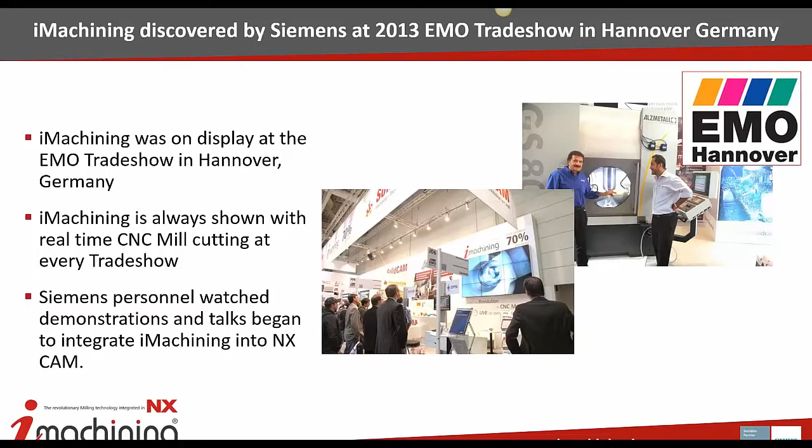Siemens became aware of iMachining back at the EMO trade show in Germany in, what was it, Greg, 2013? Yep. They were really intrigued by what they saw, and we approached each other and started development on the software. iMachining's been on the market 4 or 5 years; it's not new technology, so you're not going to be a guinea pig. It's proven technology working around the globe. The integration to NX itself has become our focus.

A little bit of what it can do for our customers. Much faster cycle times. We're managing the tool's engagement in the material at all times, so we're seeing tool life increases of anywhere from 2 to 10 times over traditional methods. It really performs well in hard materials: Inconels, titaniums. The harder the material, the better iMachining works, and we're going to show you why. You can also use smaller, less expensive tools because we're managing that engagement in the material at all times. We're finding that customers can use smaller, less expensive tools and actually get better productivity.

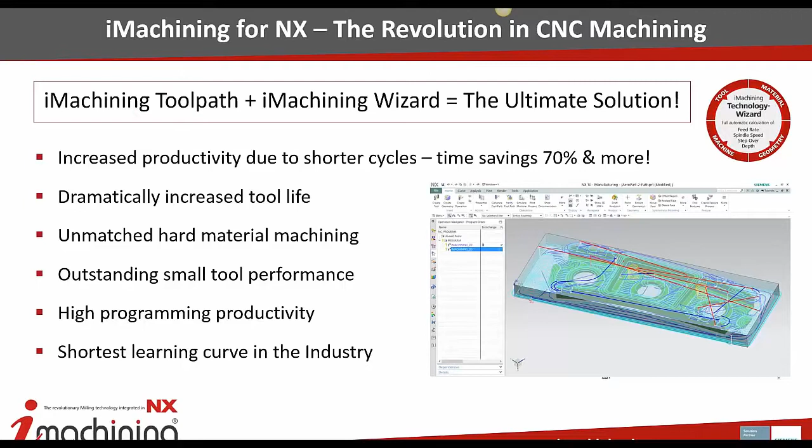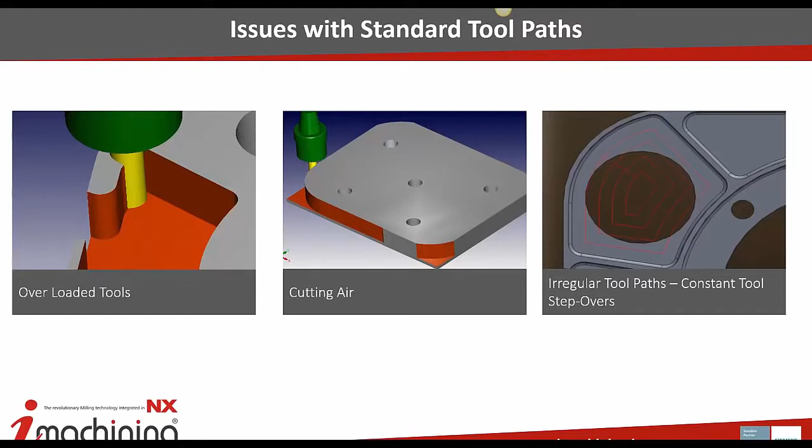Just touching on some of the technological differences between traditional milling and iMachining. Some of these scenarios might look familiar. Typical milling or machining, you're running the tool into a 180-degree engagement, and that's tough on the machine, it's tough on the tool. You have to slow things down in order to accommodate for those corners. So typically, if you're not working on a model, a lot of air cutting. And also, with your regular tool paths, you're typically using constant tool step overs.

So some of the things that iMachining is going to do, I'll throw this over to you, Greg, if you wouldn't mind. So what we do is we maintain controlled step overs. We're looking for a minimum and maximum engagement, and we maintain those. And as we're doing that, we're also adjusting feed rates as well. So if your engagement goes down, your feed rates go up to maintain a consistent chip load.

As we're machining, we're constantly updating the in-process workpiece. So we're aware of where we've cut, and we know where we need to go. And we're always trying to do intelligent transitions from cut area to cut area. Sometimes we determine that we're not going to retract completely out of the part and move over. We'll slightly move down or slightly move up a couple thousandths and transition to the other side of a pocket at a fast speed. We don't typically rapid when we do that.

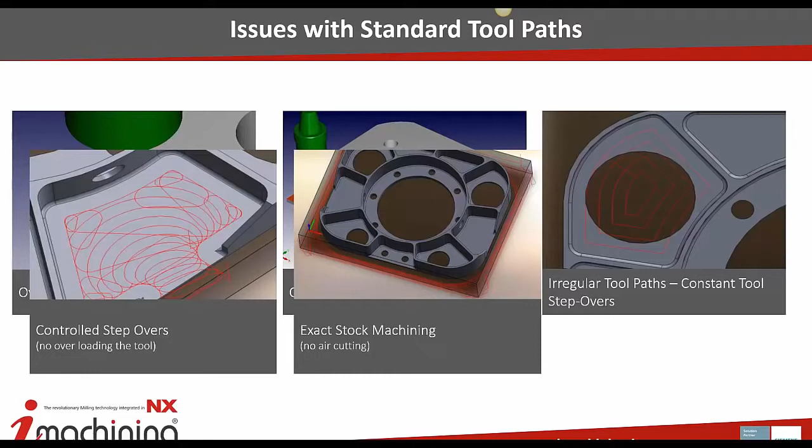We give the customers the ability to rapid. The majority of the time, we control like a 500, 600, or 1,000 inches per minute feed rate over to the other position. And we can transition around the part and do a contour transition to another area.

Smooth tangent tool path, so we're always trying to roll in and roll out of the material. So you're getting a thin chip as you're going into the cut, and you're getting a thin chip as you're coming out of the cut to make those transitions easier.

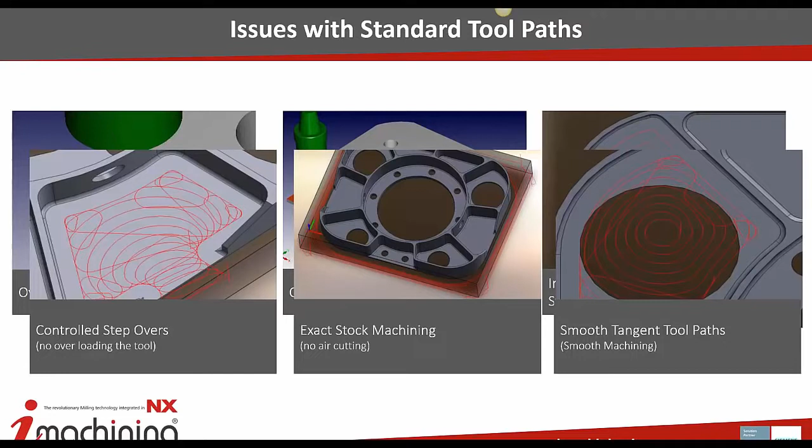Can you speak up just a little bit? Sure. For the audio online? Sure. Recording.

Some of our patented features in iMachining. One thing we do that nobody else is able to do is a spiral morph, which is the most efficient way to remove material from a specific area. And we do that by maintaining a minimum and maximum engagement. And working from the center out, we start at a spiral, and as we transition out, we try to create the shape of the boundary that we're cutting.

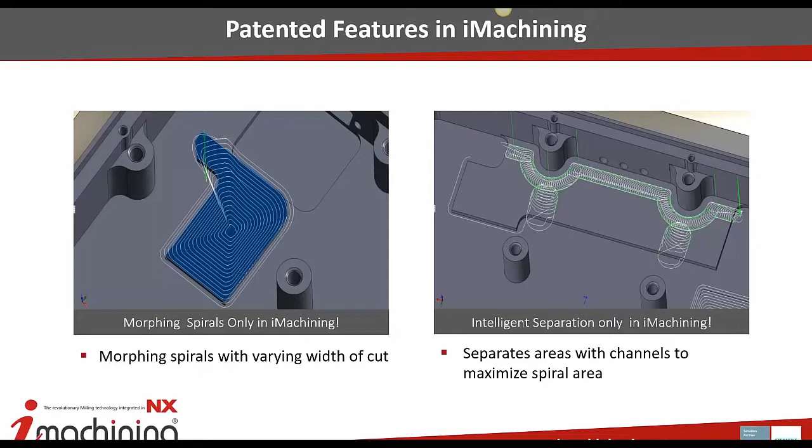Another thing that we do is separation. So we look at a specific area and determine, would it be more efficient to do a spiral morph for this whole area, or would we separate it out into individual channels and then create 3 independent spiral morph areas? So we do time calculation with both results, and we pick whichever one's faster. This kind of shows what a finished channeled and then spiral morphed area would look like.

Some people in the room might be familiar with the term trochoidal, and we get compared with that a lot. We don't do a traditional trochoidal. We do what is D-shaped contouring when we do a slot. So we transition, engage into the material, make a cut, transition out, move slightly up, and fast feed across. So you're not doing a consistent feed rate and doing large circles.

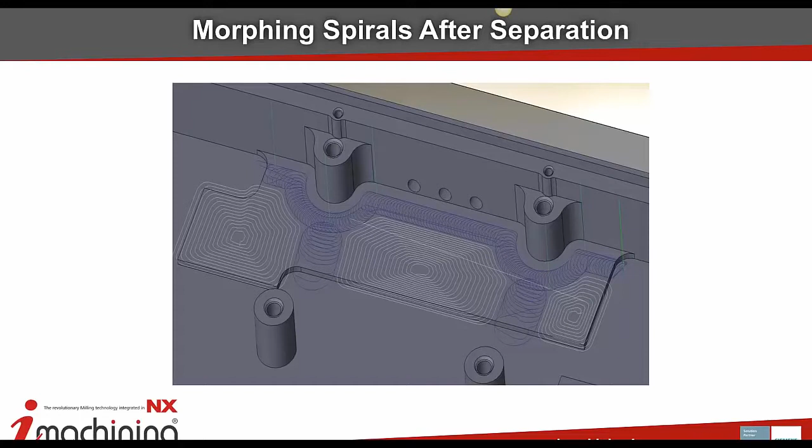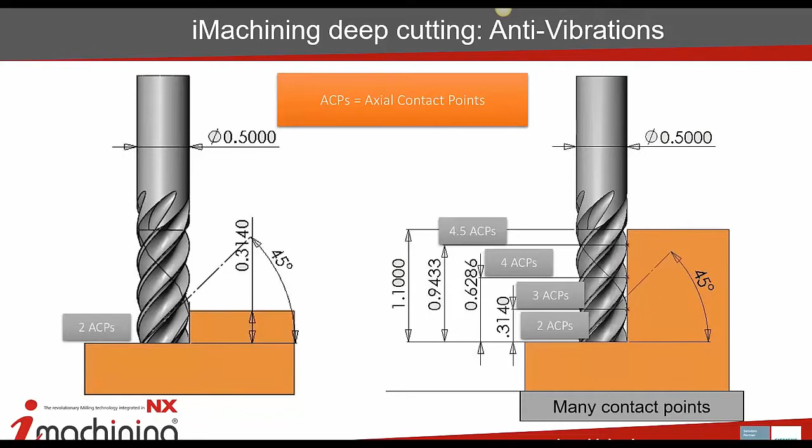Another thing that we do when we're looking at cutting tools, and you provide us with information on helix angle and the type of material, one thing that we're looking at specifically is the helix angle, and we try to maintain what we call ACPs, which is an axial contact point along the flute. We try to maintain a minimum of 3 contact points based on your depth of cut to add stability to the process. So you're not getting an interrupted flute coming in and out of the cut without another flute being in contact at the same time.

This is an example of rest machining in specific material or specific areas. You can see that we tried to do as little motion as possible. We transition down in the part. We're not retracting up unless we have to.

It's kind of interesting because the genesis of the technology, everyone, was for corner picking. And the developers at our company started figuring out, boy, that's an efficient tool path. How can we apply that to cutting an entire part? Went to work on that, and it's really been a nice solution.

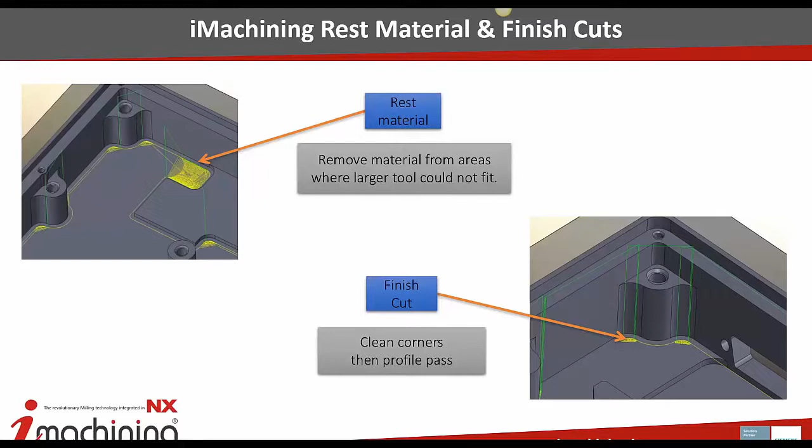Another thing we do that nobody else is currently doing is what we call scallop height tolerances. So when we manufacture a pocket, we'll go full depth, and then we'll do a scallop height calculation. If you're on a contoured surface or an angled 5-axis wall, we'll come back after we went full depth and move up those features and create a scalloped area. So you're not having to create a semi-finished path to come back in and clean those areas up to go into a finished operation.

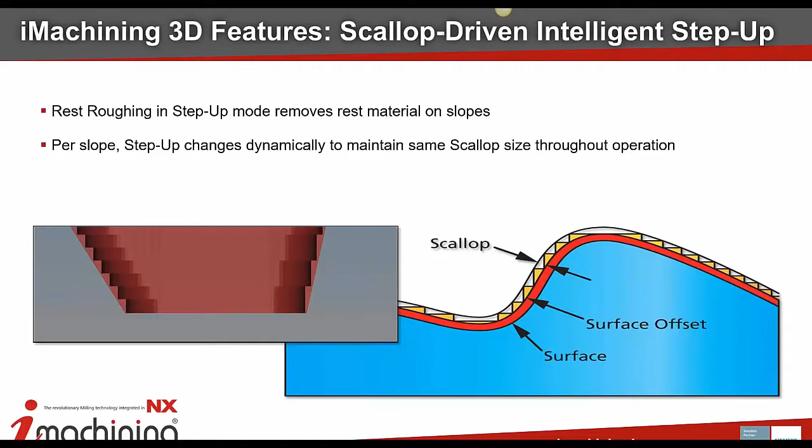This is really kind of what we're utilizing with the iMachining technology. And in a nutshell, we're taking into account the machine, the material being cut, the geometry of the part, and the tool that you're using, and giving you what we call a machining level. Greg's going to talk about this in the software, so I won't beat it to death right now. But it's really like putting a skilled machinist at your fingertips.

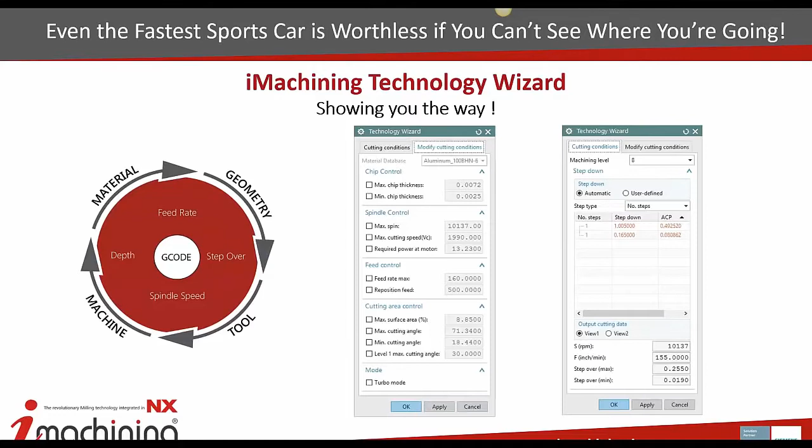And for anyone in the room that is a highly skilled machinist, I feel like it really gets you to most efficiency on that first part versus having to guess or kind of slow things down to make sure you get it and then ramp that up. So we'll talk about this in a little bit more detail. Really can help improve efficiency all around.

Again, there's 4 things that we're managing. Material, Greg, if you would. These are the things we look at in regards to the material itself. Hardness is one of the keys. As far as the tools that you're using, those are what we're monitoring. And it's situational per the part and per the job. So we're analyzing that each time you're having to program a part.

Geometry itself, we're looking at the maximum depth, going down as far as we can every time. And then the machine, we're looking at the maximum power of the machine, the maximum spindle speed, and the maximum feed rate. So we're doing all the hard work in the background based on these parameters.

Again, not to run any of my competitors down, but what we're seeing is they're doing full engagement, full depth cutting, but there's still a lot of manual data that has to be entered. I've seen one where you have kind of a spreadsheet. Machine could be this and material could be this, and you're having to kind of figure out. We're doing that all automatically for our customers.

One thing I'd like to touch on is the max power. So one reason we do max power is if you do a lot of aluminum machining, we have the ability to base feeds and speeds and depth of cut on utilizing as much horsepower as possible. So we'll increase feed rates, increase depths of cut, and based off the type of material, we will determine how to get it to the maximum horsepower.

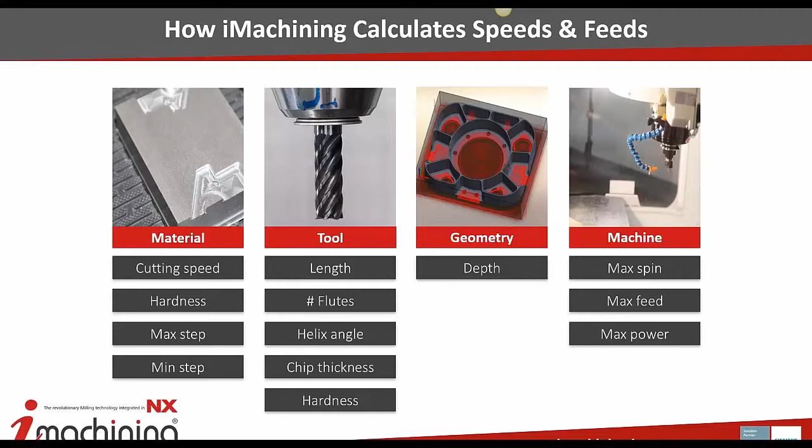Just one quick thing to touch on the tools too. There's a common misconception sometimes; people think, right, technology is great, but I'm going to have to buy super high-end expensive tools. And what we're finding with iMachining is that you can buy smaller, less expensive tools because we're managing the engagement and the material at all times. Those less expensive tools are actually lasting longer because you're never running them into that 180-degree engagement. And again, the harder the material, the better iMachining performs.

Quick video, we'd like to show you iMachining in action, gentlemen and ladies. I'll make you presenter. Any questions about the technology before we kind of hop into the video? Everybody still? Todd?

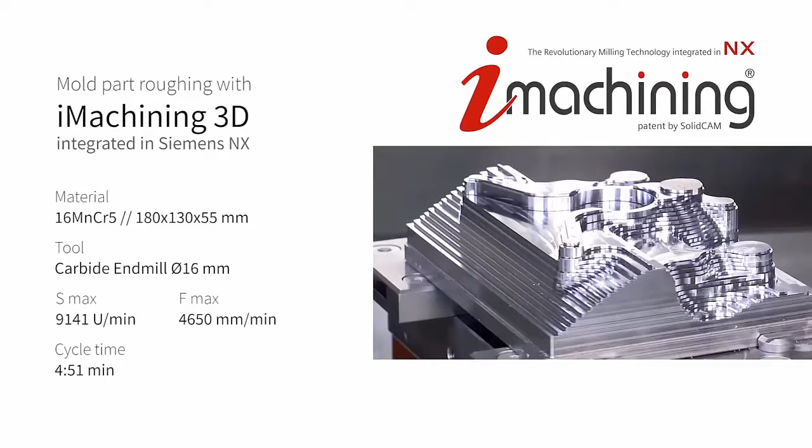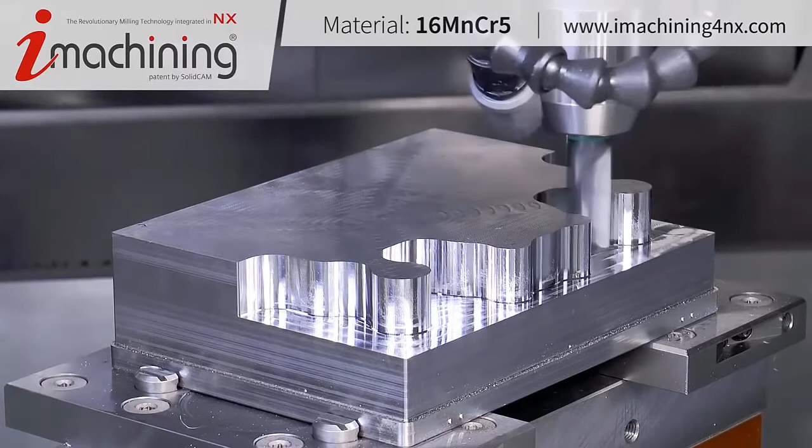So as you can see, when we're transitioning back into the other corner, that's not at a standard feed rate. We're just doing a fast feed to get back there instead of doing the traditional coming back up, going over the part, coming back down and wasting time.

So if we have a feature, as you can see here, we have a feature that is not as steep of an incline, we do less cuts there. The area that's more steep, we'll add extra passes in there to maintain that scallop height.

So we have had instances of people looking at having to add a machine. They got better productivity with iMachining and could put off adding another CNC. So that's situational a little bit.

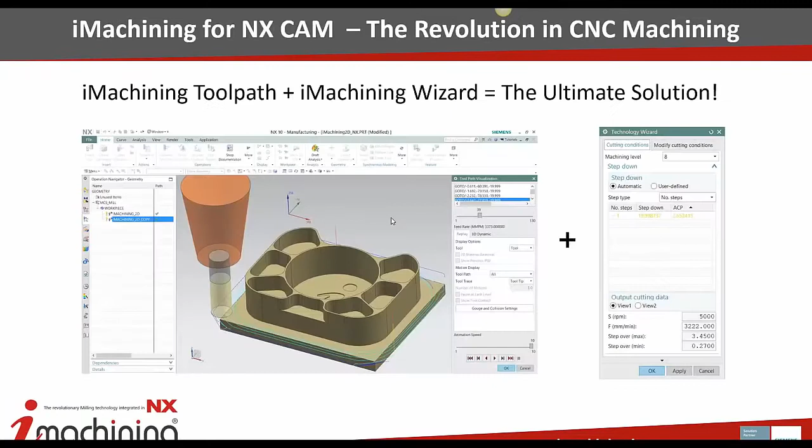That is kind of it, I believe, Greg, for the PowerPoint, correct? That's the last slide right there. Any questions? Yeah. If there are any questions, we'll take those now. Otherwise, let's hop into the software. Anyone? All right, let's do it.

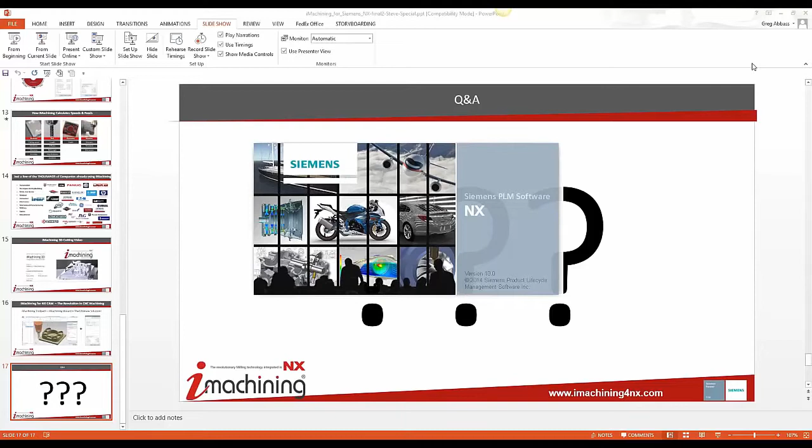All right, so to start off showing the software, I'll go over a few things initially. First being the two types of operations that we provide and where they're located. So typically, as in NX, you're going to go find iMachining in the drop-down, and we provide a 3D toolpath as well as a 2D toolpath. 3D works very similar to cavity mill, but with our technology. Geometry selection, you're selecting a part model, a stock model, check geometry, things like that. 2D, you're selecting a boundary, just like you would in planar mill.

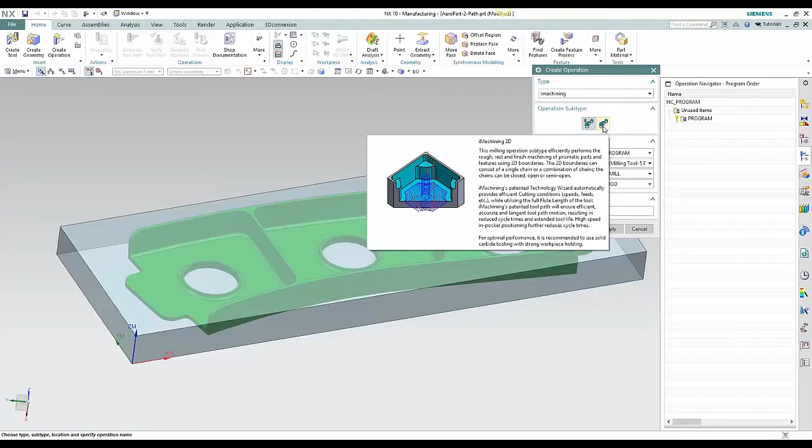So we'll start off going through an operation. I've already got some tools built, unless anybody would like me to go through pulling the tool or anything, showing that part of it. Okay. Select the workpiece.

So this is the interface for iMachining for the 2D side of it. We'll start off by going through some of the settings and how they work. We're looking for a few things. So we look for what machine you're currently wanting to work on. I've got a few options there. And the type of material. We've got a pretty extensive library that comes in the install of alloy steels, carbon steels, tool steels. So we'll select aluminum for now.

And then we also look for something called a machining level. So what this does is gives you the ability to say, is my setup secure? Am I working in a vise low on the table, or am I working up in the air, and I'm kind of concerned that we're going to get vibrations? You've got the ability to adjust parameters based on your setup.

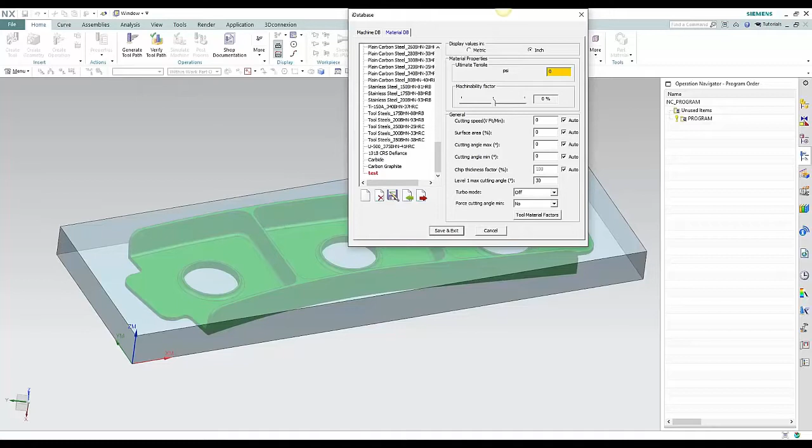So with that, we also have some technologies inside of 2D iMachining: iFinish, iRest, iRough. iRough is traditional roughing toolpath. iFinish is after you created a roughing path. If you want to turn that into a finish, you just copy it, bring it down to the next level, and turn it to iFinish, regenerate, and then it creates the finish path for you. iRest, we can do one of two things. We can look at a previous tool, or we can select a previous iMachining operation to grab the updated stock from.

So geometry selection is a little bit different. It is internal to the interface. So we'll just come in here and we'll select these 3 cylinders. And then from there, you've got the ability to do 3+2 if you want to do it on an angle to the part. If you're doing 3-axis work, we'll leave it at standard tool axis. And we're also setting cutting levels in this operation. So we're looking for the clearance level, the upper level, and the depth. You can use model features to select this.

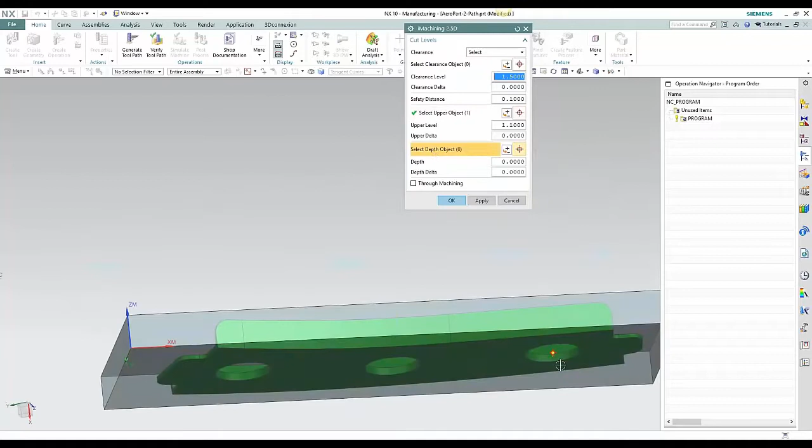Cutting parameters. There are some features in here to control specific things. You can control the step downs if you're not using the wizard. Wall offset, island offset, floor offset. So I showed you in the PowerPoint channeling. So you've got the ability to modify those channels as well. You can say I want the channel to be 1 inch instead of 3/4 of an inch wide. You can also do what we look for is a thin wall. So if you're coming up to an island or another thin wall and you don't want that wall to get below a specific thickness, we've also got the ability to control that as well.

Arc fitting, if you've got older equipment, instead of linearizing all the motion, we can kind of do a poor man's NURBS, if you will. We'll take those generated points and create an arc to best fit. So from here, here's where your tool selection is. Like I said earlier, you've got carbide, cobalt, high-speed steel, and premium carbide. And then we're also looking for the helix angle of the tool to find out what the actual contact points are.

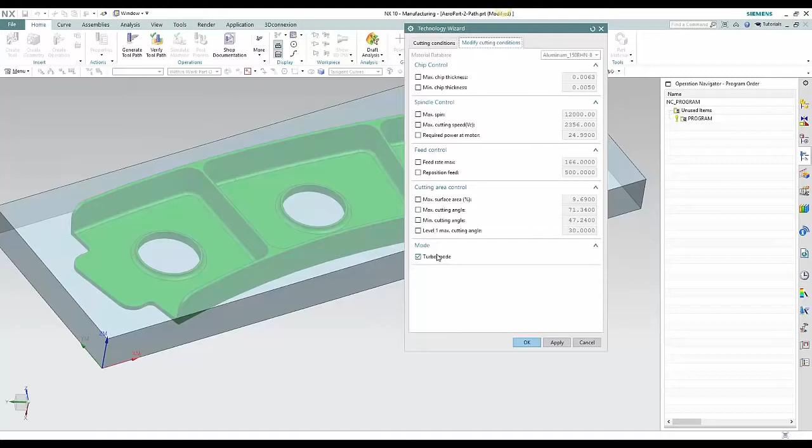If you want to get a little bit more aggressive on your maximum angle, you want to change your chip thickness from 5 thousandths to 8 thousandths, things like that. We also have what we call turbo mode, and what that does is, typically in aluminum, people want to get a little bit more aggressive than what we do with the standard calculations. So when you click turbo mode, machining level 8 becomes 1, and then you get another 7 levels above it. So, from there, we'll generate the toolpath.

As you can see, it's a circular hole, so you get a helical entry, and then you get a spiral out. Like I said earlier, if you wanted to create a finish operation, you can copy and paste it, come back in, change it to an iFinish.

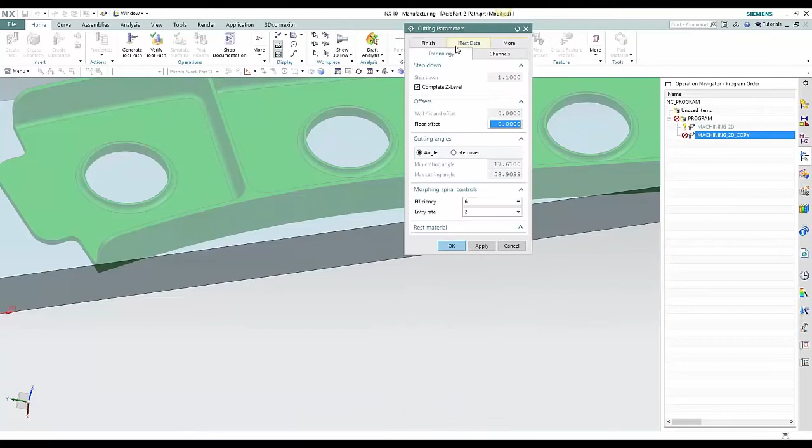Select the previous operation so it knows where it was, and generate. So now you've got a finish path.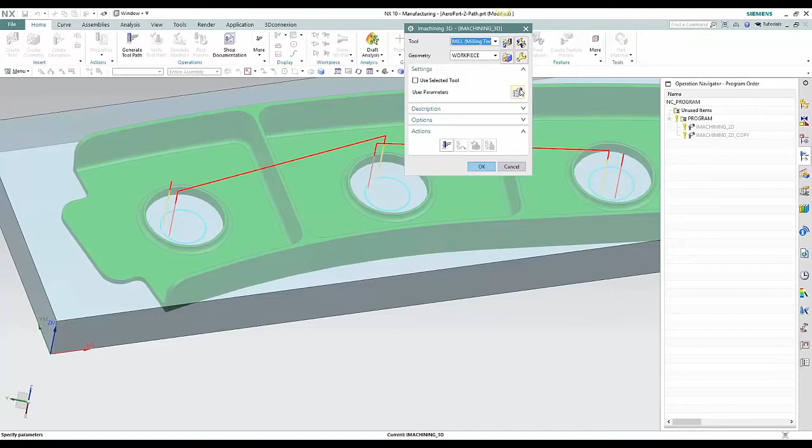So from here we'll go and we'll do a 3D iMachining operation. Majority of the interface is the same. There are a few extra things that may need to be filled out or used. We're looking for a geometry group with a part and stock in it. Even in the 2D operations, we do require at least having a geometry group built so we can update the stock and pass it to the other iMachining operations.

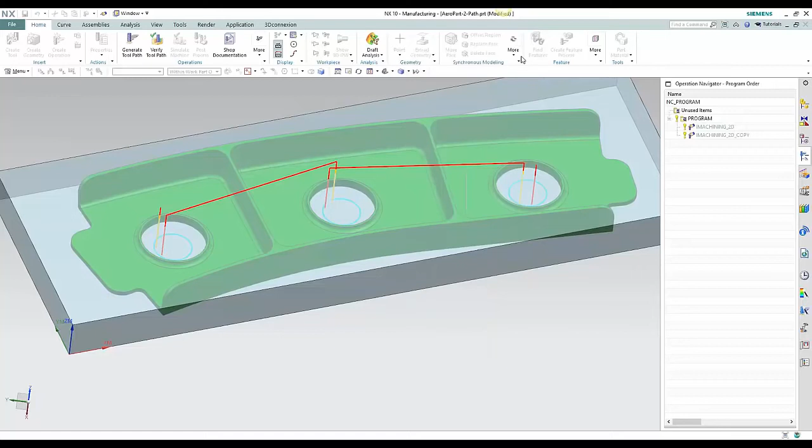Settings are the same. I don't have to come back in here and reselect everything. We update at the main level. When you create your first operation, it stays in the file. You don't have to push it or do anything. So it maintains all of its settings from the previous selection.

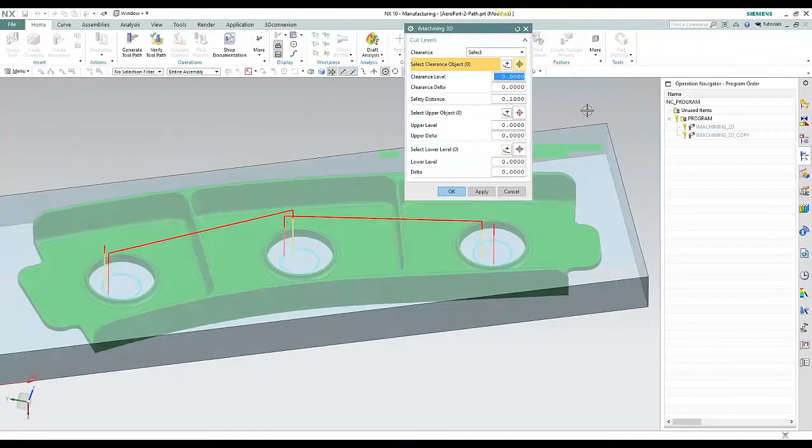So for 3D, we'll do the same thing. We'll select our clearance level, our upper level, and I'll come in and I'll just select a feature on the part.

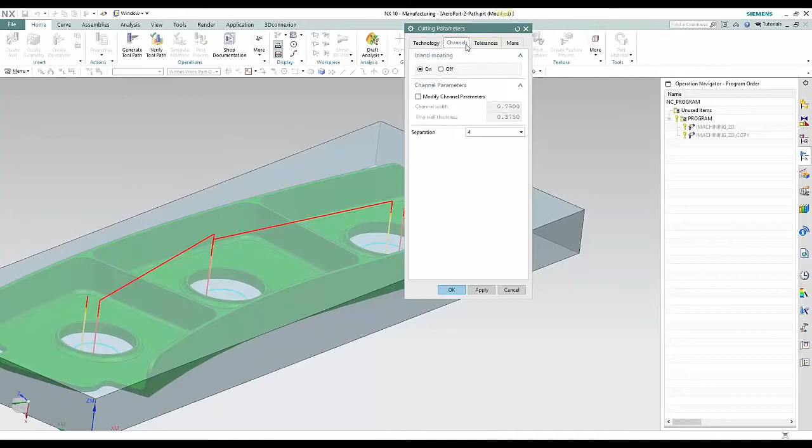So in the cutting parameters, there are a few things. So we talked about scallop height. You can either do it by scallop or you can do it by constant. Typically, I do it by scallop. You get the ability to come in here and modify what you want that scallop height to be. If you wanted it to be 5/10 or 5/1000, you can come in and modify it. We'll just make it 150. And we'll generate.

Any questions while it's generating? Yeah, you can do an entry hole. You don't have to select an entry point either. We know the hole's there, so we'll use that if we deem that that's the most efficient way to get into the material.

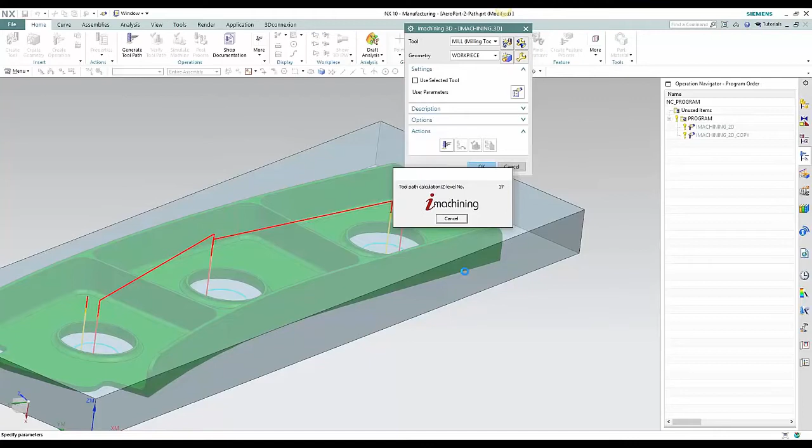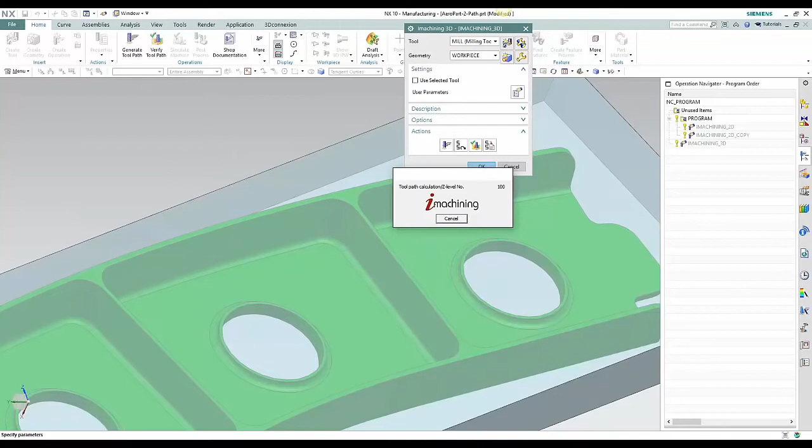So there's the operation. You also have the ability to do a trim boundary. So if you wanted to come in here and say, I want to do a working area, come in, select tangent curves and say, I want to do that pocket there, and recalculate. This part's not big enough to show you. I'm going to open up a larger part and show you some of the processing stuff that's going on in the background as well. So you've got the ability to select a specific area if you want to stay inside of it.

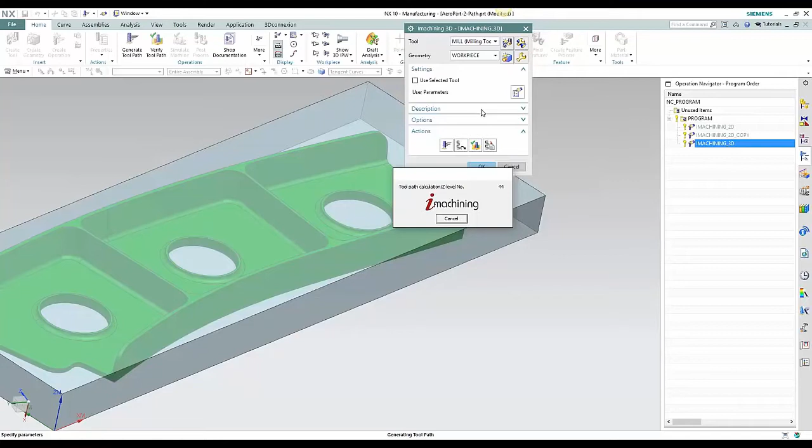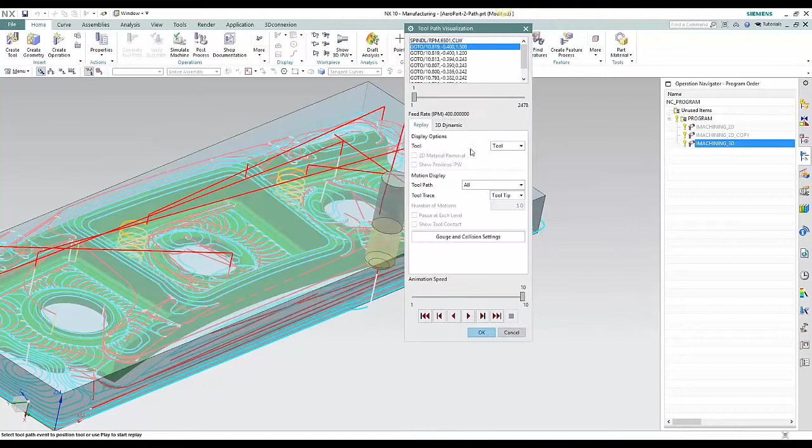And if you're curious how it works with Siemens internal operations, you can do a planar mill operation, you can do a 2D operation, you can then do a 3D iMachining, you can flip-flop back in and out of sequential mill. As long as you're updating the stock through a geometry group, we know what's machined and we also use it as well. Verification works the same. So if you wanted to do a 3D verify, you can come in and do a 3D verification.

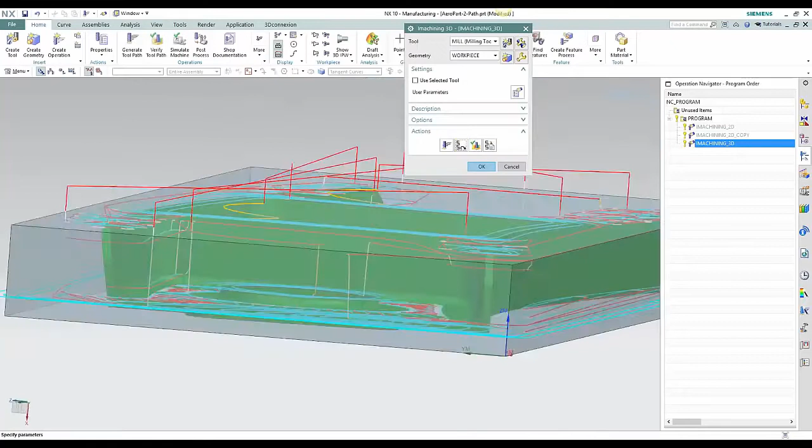Also, you can see one side's a three-axis wall. The other side is a 5-axis swarf wall. So you can see where there's one path down at the main level on the 3-axis wall, and then on the 5-axis wall, we come back in and clean some of those scallop heights out because the wall's tilted out. I'll open up another part, kind of show you some other things.

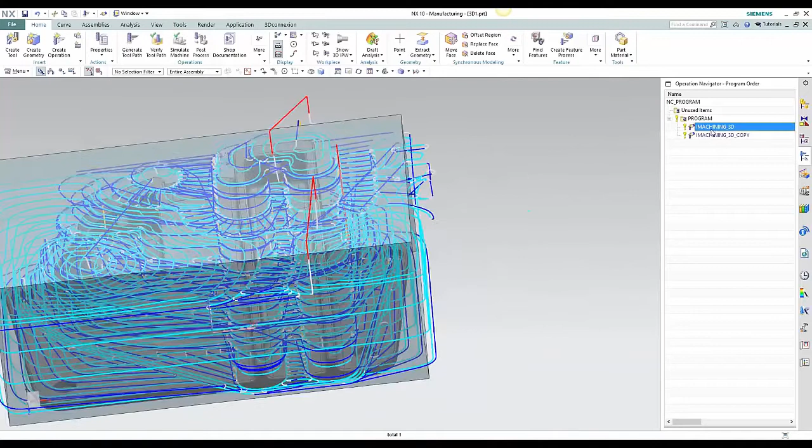This is more of a contoured part. So you can see we're coming in, we're scalloping as well. So we'll kind of verify this so you can see some of the motion.

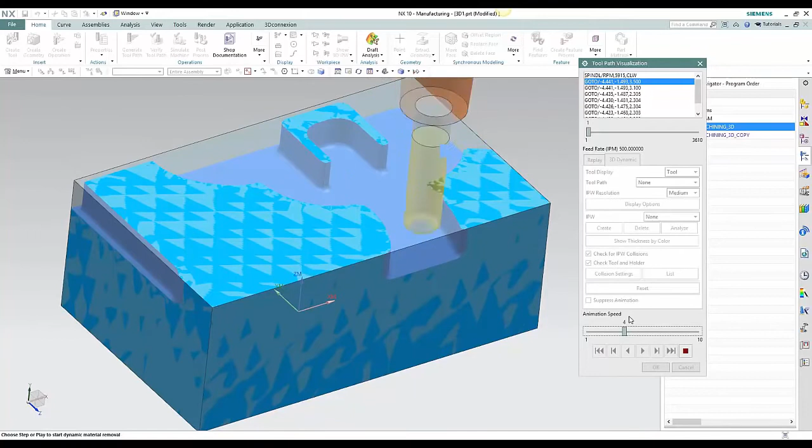One thing we do, I don't know if it's going to show it here, but if we do channeling, and then we come back from another direction, like it just did previously, as we exit, we also change how we approach the material. We try not to leave peaks, and if there's a peak, we'll come back out from the other side and roll into it and roll around it instead of just coming straight at it and trying to contact it with the flute of the tool.

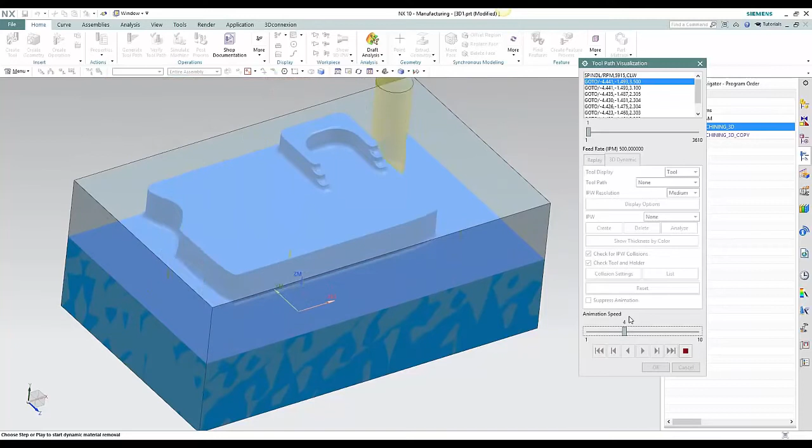So you can kind of see it does the main level, and then we're going to come back as soon as this finishes. We're going to pick up any of those scallop effects.

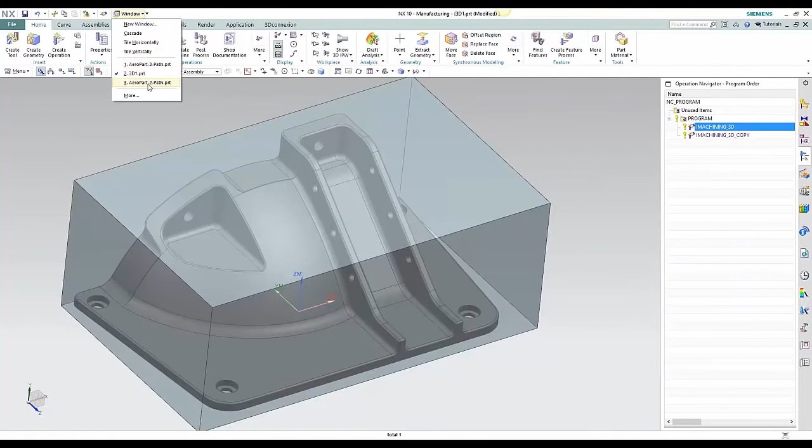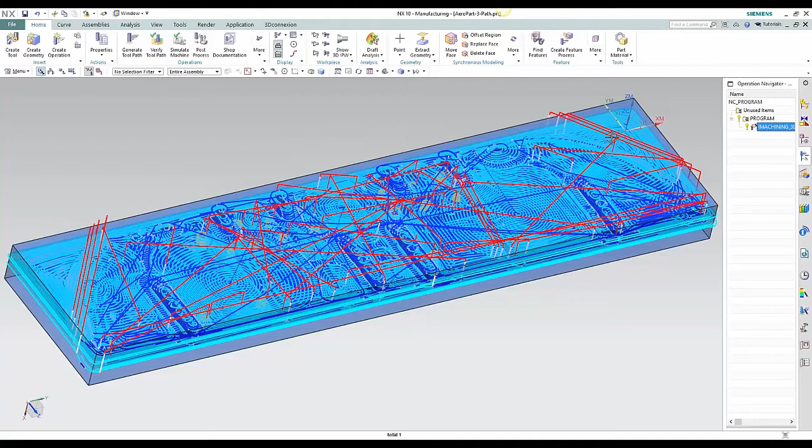So if you see, what we do initially is we layer the part, determine each level, and then once we've done that, you'll see the CPUs will go. We'll utilize as much of the CPU as possible. Once we know the levels, we take each level and send it out to a separate core.

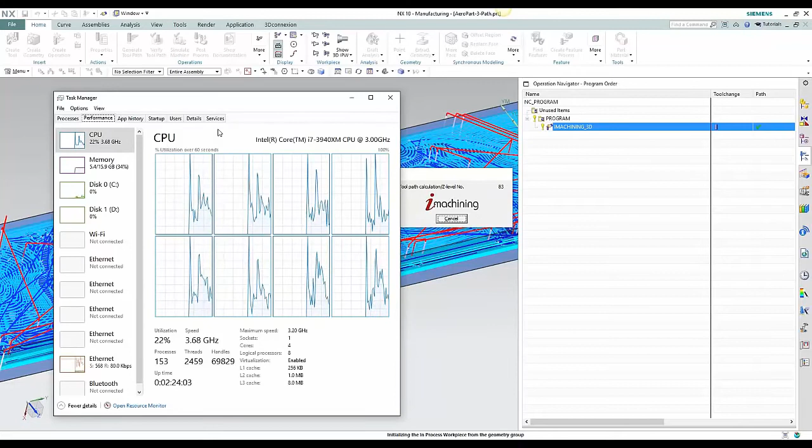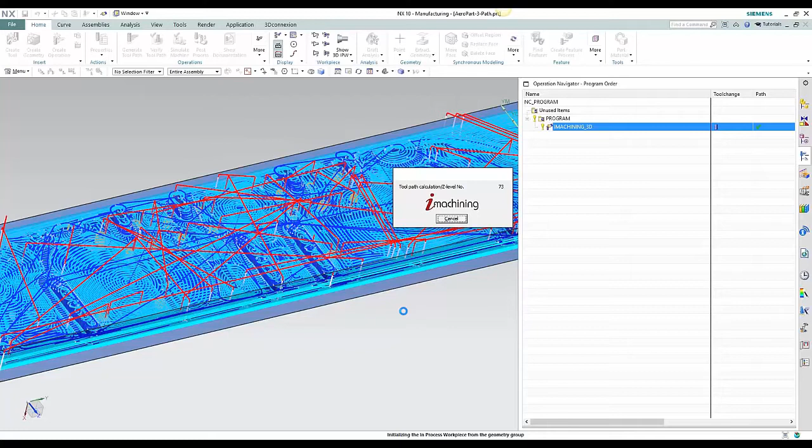You talked about too the ability to kind of differentiate. You have some choices. You can really have iMachining pay attention to tool life or cutting speed, with level settings and stuff? Yeah, exactly. Sure. I don't know, it seems like it's maybe a go-to medium.

It's a really large part, so there's a lot of calculation going on, and I can cancel it. Any questions? We'll cancel.

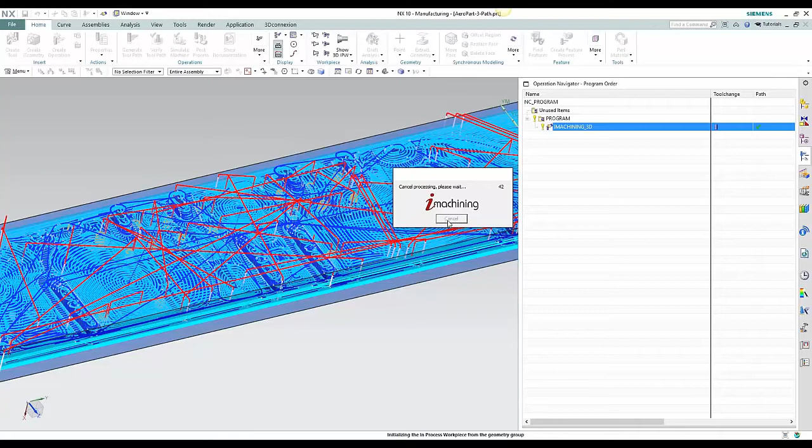Yeah, I got questions. A little close to the end, so I didn't forget. I know when I was doing this, you talked about how that 70% number was calculated between time frames. Can you give us maybe some case studies or examples of that? Or maybe some averages that you typically see. Obviously, that's a pretty big one.

Yeah, I mean, it's subjective, as any number is. It's based off of traditional type tool paths, full slots, taking smaller depth of cuts, and using a traditional style tool path is really what that 70% is geared towards. It could be less than that, it could be more than that. It depends on the specific application, and that's just kind of our rule of thumb of what we see on an average from our users that are using the traditional constant step over tool path.

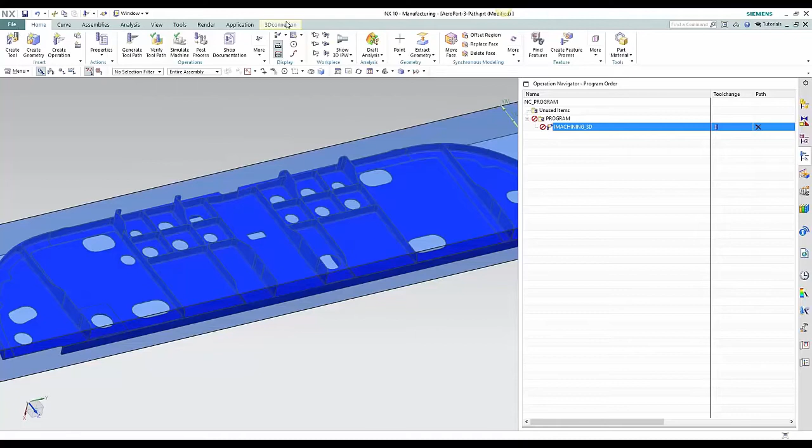It's kind of interesting too, because Greg and I had a part of one of the videos that was an Inconel pocket that I believe a gentleman in Colorado was cutting, and he was getting one pocket per tool, and it was taking about 2.5 hours. We investigated the technology, and it wasn't my customer, so I'm not sure of the specific numbers, but I know we were cutting that same pocket in about 20 to 25 minutes for him. And we cut 5 pockets. He had to borrow material. We cut 5 pockets, and the application engineer said he could probably have gotten 1 or 2 more pockets out of that same tool.

And Steve touched base on how do you set it up to gear itself towards more tool life versus cycle time. Most of that is handled with the cutting condition stuff. So if you wanted to increase tool life, you would obviously just lower the level, which is going to reduce your step over, your angle of engagement.

Some other things you can try to do is you can go to a higher level, keep your RPMs and chip loads higher, and then lock in your maximum cutting angle to a lower level. So you can change it from 70 to a 50-degree cutting angle. And your min, you can knock it down to a 10-degree. So just keeping your engagement time down, but increasing productivity still.

That does come up. Usually what we tell people is, hey, let's get together with you on one of your parts, tell us the parameters of the machine and whatnot, and let's put it to the test. 70 is kind of the number we honed in on. Seeing a lot more, seeing 10 to 25% more. We haven't had a customer be really mad that they're even getting 25 to 30% more productivity over their old way of doing things. They can pay for the software.

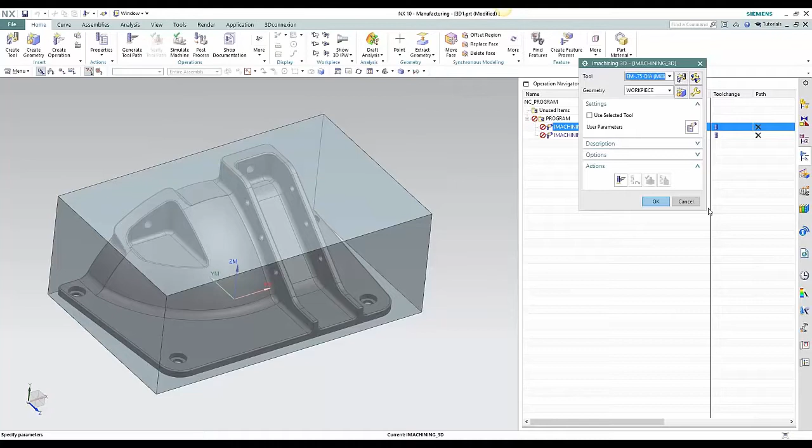You got anything that you'd like for me to show? Or? Do you have like a cavity mill generated anywhere? Yeah, where you could do a comparison. Yeah. So let's go back. So I guess kind of what we have currently is cavity mill, and you don't even have to do trochoidal if you don't like. You just do a regular cavity mill operation, and then compare it to iMachining.

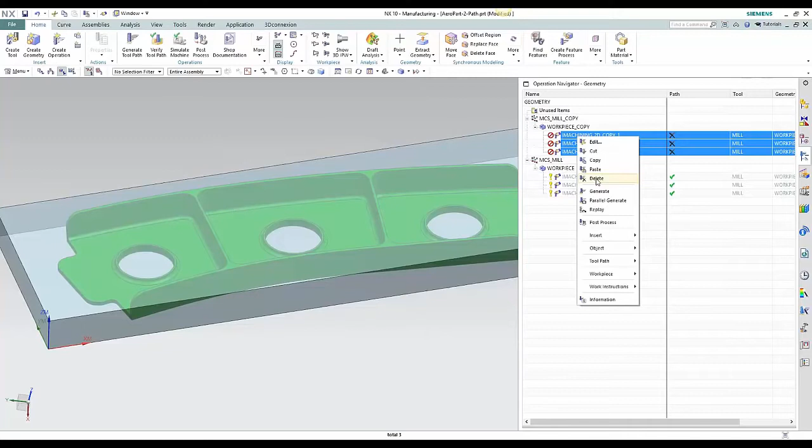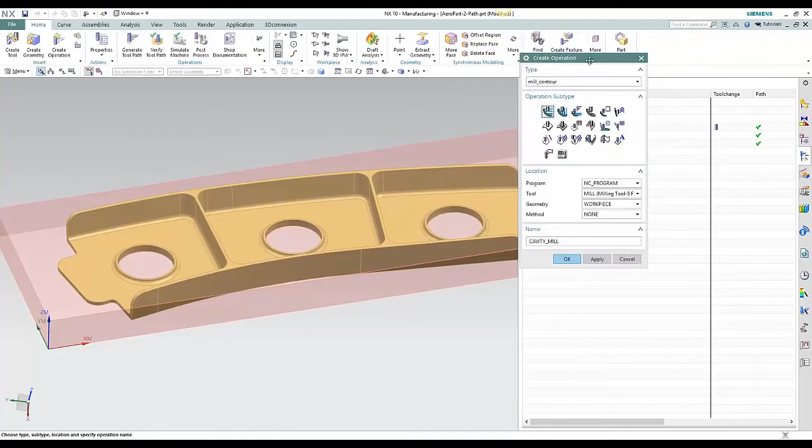We were in class the other day and just did a simple part, and tried to guess at what we would use as far as speeds and feeds on the cavity mill operation. And we put them fairly close to what the iMachining operation was doing, but we knew that tool was going to engage in the corners, and you can even see it in the verify. That tool is going to engage in the corners, and it's not going to last. It's either going to wear or break, one of the two, with cavity mill. So what we end up doing is slowing things down, taking smaller step downs, and so instead of that, this basically does it all for you.

The other thing I really like about this, and again, this is new to NX, so it is new to us as well. So I've just now started kind of testing the software, and the technology wizard. That's the correct term, right? Yep. The technology wizard. So that gives you a good starting point. I'm not real familiar with a lot of the harder materials, so that gives you a very good starting point. And then go test it, and then adjust from there. So that is one of the things that I really liked about it. I was able to just install the software and start creating tool paths pretty easily.

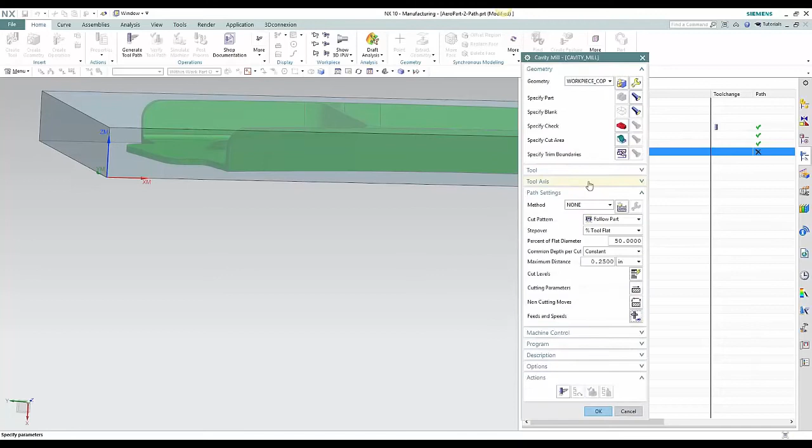So we had the material based as an aluminum part. I'm going to keep the RPMs the same, and I'm going to do a feed per tooth of 10 thousandths to give it a little bit of an advantage. So we're going to do 130 inches a minute. But we're going to do a 1/4 inch depth of cut because we're not maintaining a constant step over. So is it driving, you try and maintain a constant cubic inch? Is that what's driving it, or is it trying to maintain an engagement? It's an engagement. Yes.

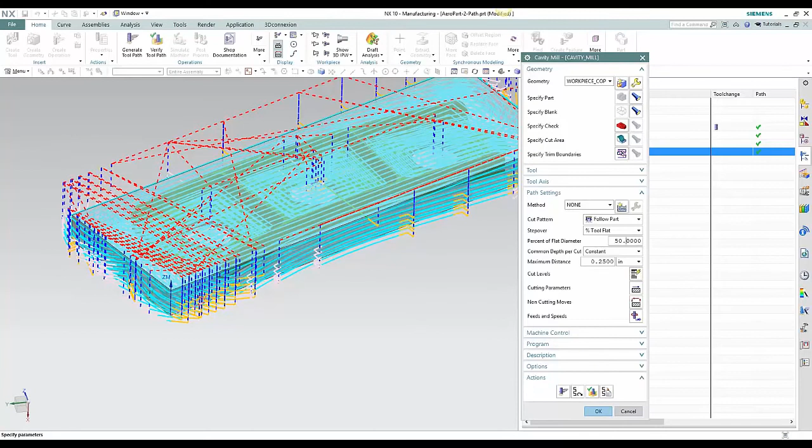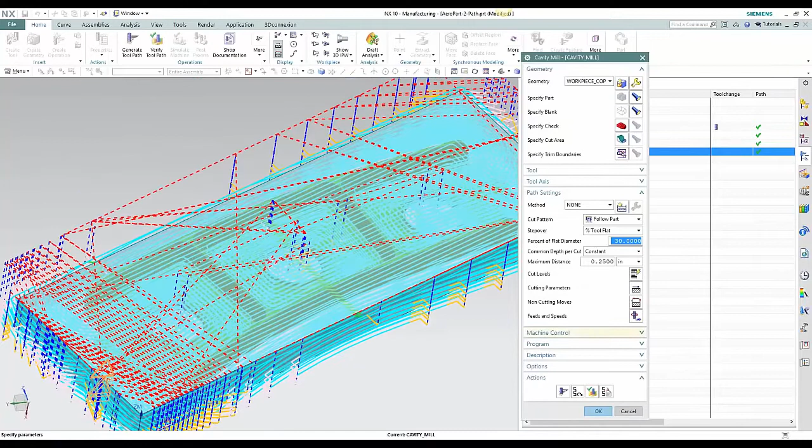So we're going to do a 30% step over. We'll be a little generous to it. We'll turn on smoothing and give it a big enough radius so it's not going to slam the corners too bad. So let's see here. Apples to apples, 34 minutes to 13 minutes. And that's on an aluminum job, which is a pretty big savings as far as motion is concerned. And you feel like the harder materials, that's where we really start to shine. Yeah, the harder the material, the better. Yep.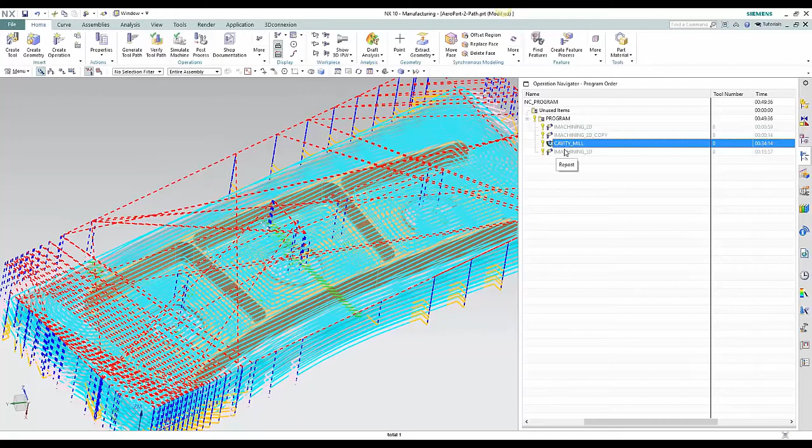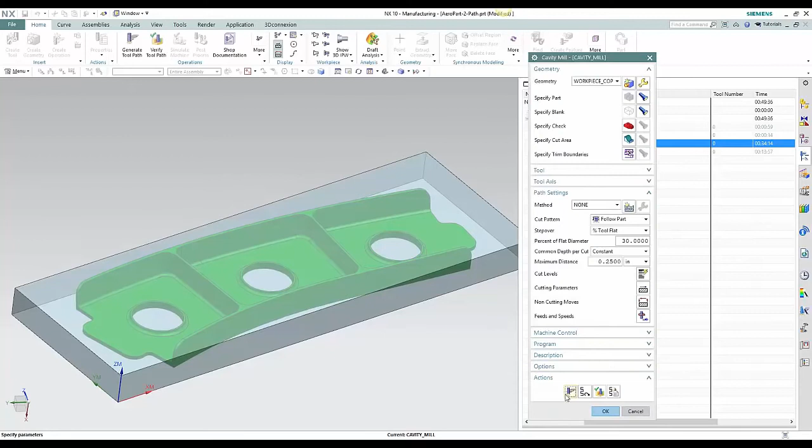Moving forward, like, you guys are interested in, is there a scenario where you can do a trial? I mean, I can get you a quote, okay, but how typically do you do it? Really, whatever makes the most sense. We'd certainly like to do a private one-on-one overview where we can show you in a little bit more depth how the software operates. We like to do the workflow of the software on basic parts. Then we would love nothing more than to get parts from the customer and do an overview to kind of show you how we'd approach your part with iMachining.

Yeah, by all means, we would like to see it in use at your shop. We could provide trials or eval versions. Not a problem. We definitely prefer doing a little bit of the hands-on approach. That way, when we let you loose with it to do what you want to do, you at least feel comfortable enough. Is it where they would send in a sample part, and then you guys would run the tool path on it, and then send that back? Yeah, we would send it back to them, and then we'd also set up a meeting and kind of go through some of the operations, make sure any questions they have could be answered on a one-on-one basis.

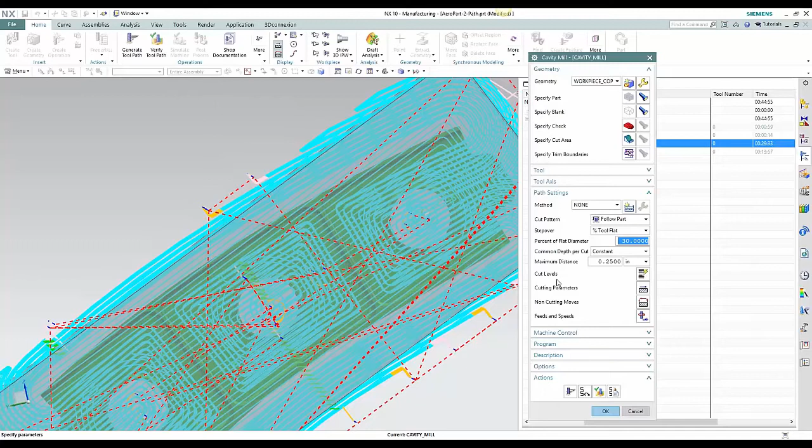And along those lines too, licensing. It is a floating license. So it's however many users. So it's set up as a floating license, so as many users as you do license. And by floating, it's not a,

I've opened NX, so I grabbed a seat. I opened iMachining, I grab a license. I close it, it sends it back. There's no checking in, there's no checking out. It's strictly driven by opening up an iMachining, or if you're external and you generate, or you're doing anything with that operation. Once the operation is closed, it's checked back in.

You don't have to close NX. You don't have to do anything else. So that's something to definitely point out, that it is a big advantage. That's actually how all the rest of the NX operations are working as well, but some other solutions aren't. So definitely an advantage to be able to use however many units we have. Again, operation's closed and somebody else can use it.

Greg, there was a question back here too. There is one other, they call them a named competitor. We don't think they are, but could you just discuss a little bit of the differences between iMachining and the other? Sure. Most of our competitors do not give you any ability to calculate speeds, depths of cut. It's all manual entry. You've got to figure it out on your own. And that's where we think one of our largest competitive edges is, we try to help you get there, at least have your best success first time right.